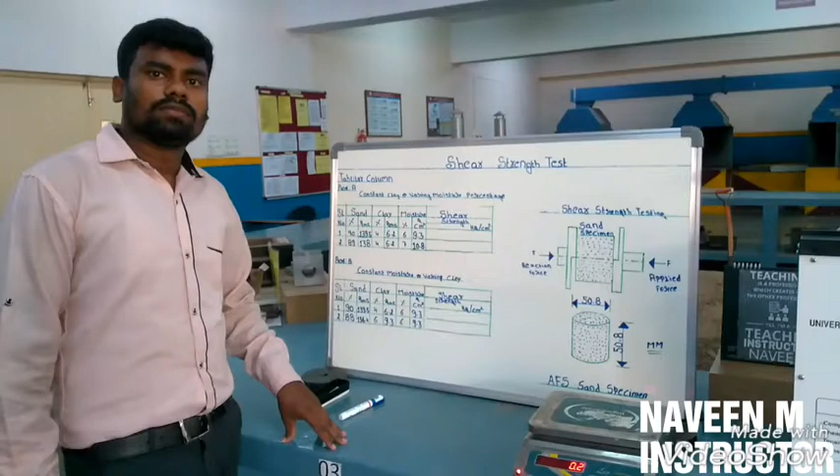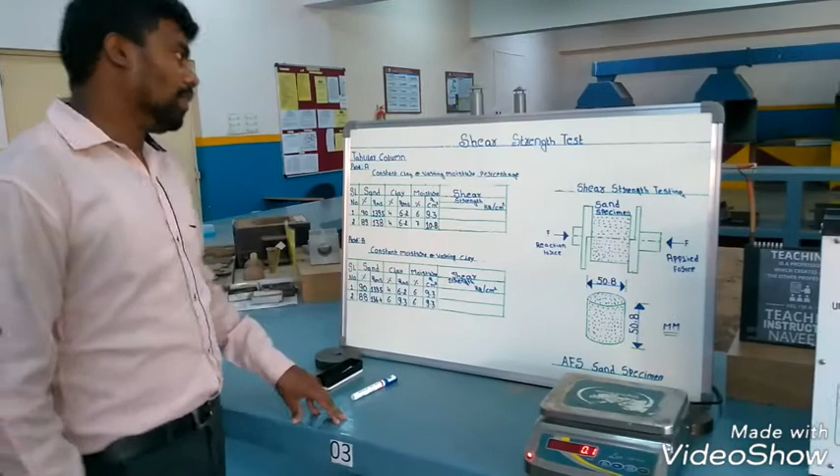Now we are doing the shear strength of green sand. When we pour the molten metal into the mold cavity, the shear force will appear. For that we want to do the shear strength test. Here we have written the tabular column, part A and part B.

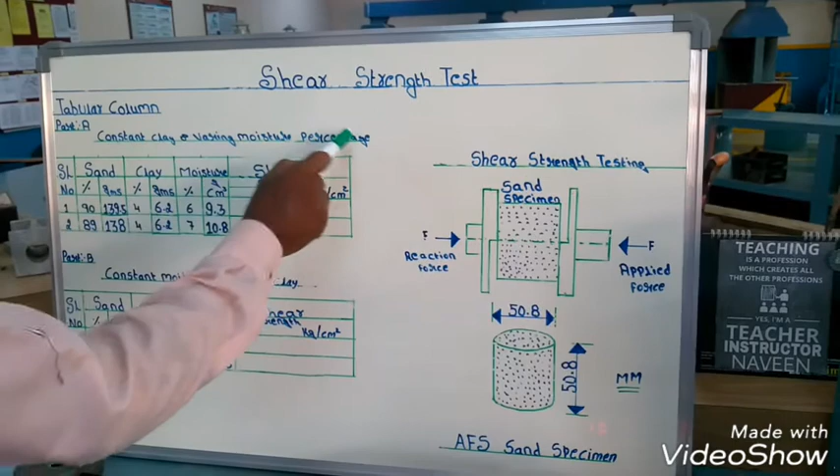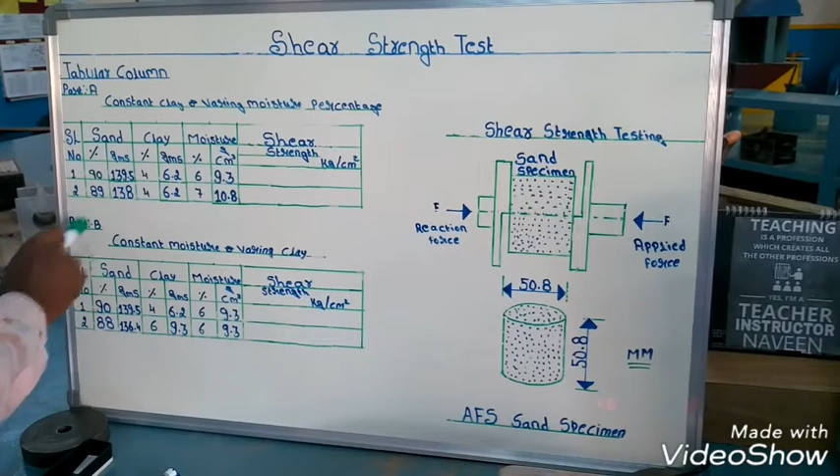For part A, the clay is constant and the moisture percentage varies. For 4% of clay and 6% of moisture, we want to find out what the shear strength of the green sand will be. Part B is constant moisture and varying clay. Here the moisture is taken constant and the clay varies 4, 6.

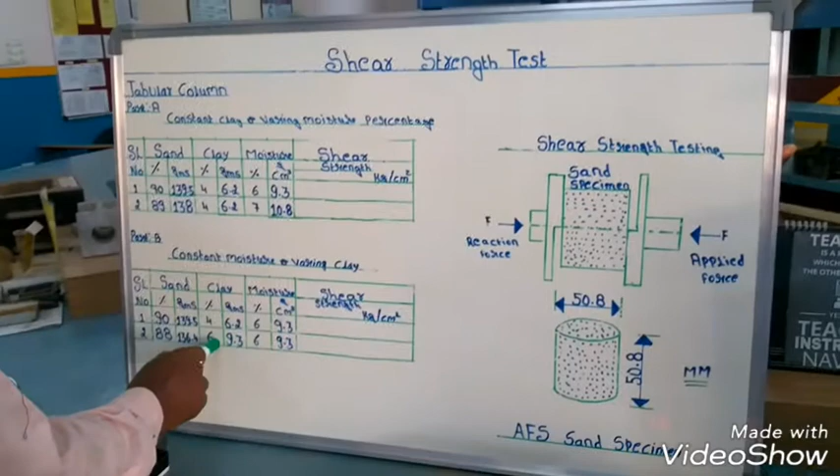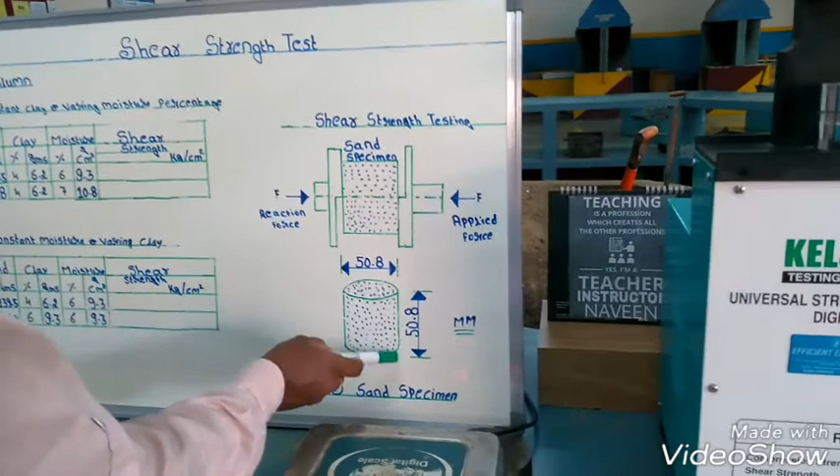Here we take the standard sand weight, clay weight and moisture, because we want to prepare the specimen with diameter 50.8 and height 50.8. When testing the shear strength, this is the standard height of the American Foundrymen's Society. As per this, we prepare the specimen now.

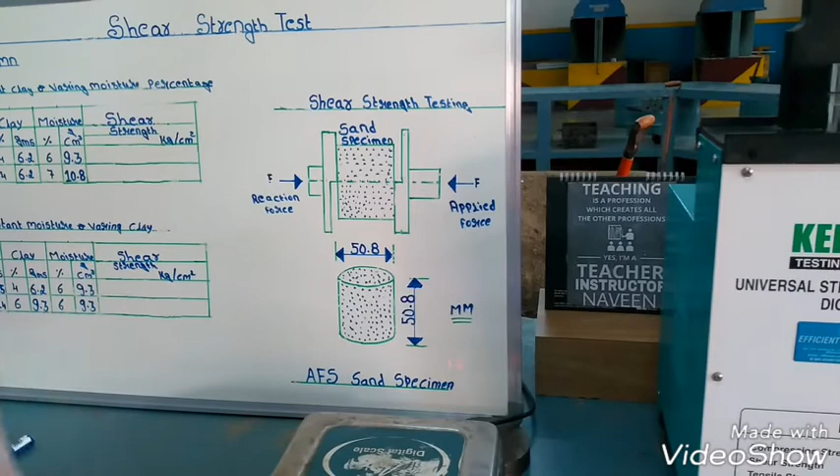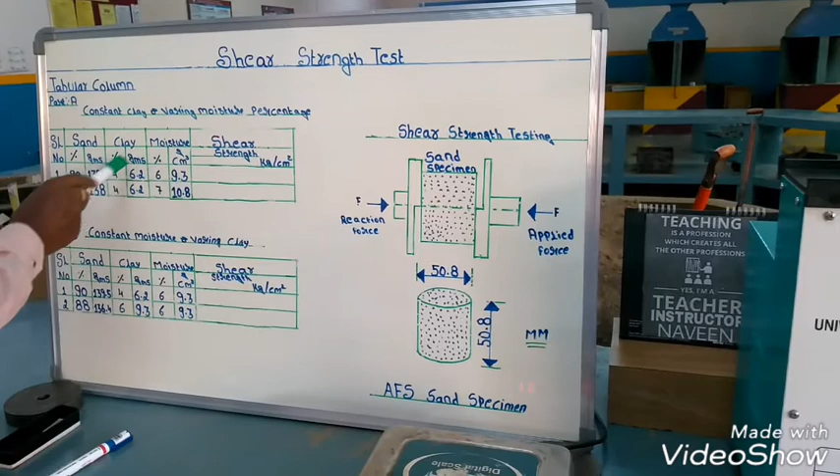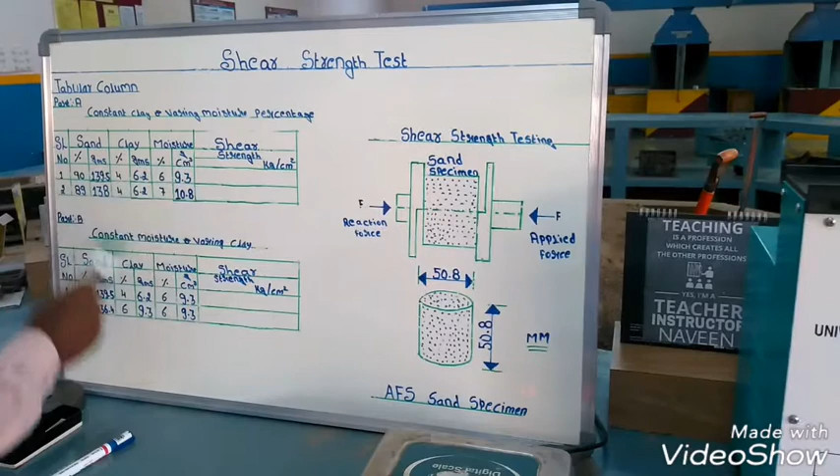When preparing the specimen, the sand is 90%, the sand weight is 139.5 grams, the clay is 4%, which is 6.2 grams, and the moisture is 6%, which comes to 9.3 ml; we can take it in grams also. We take these standard values because to prepare a specimen of height 50.8, the total weight should come to 155 grams.

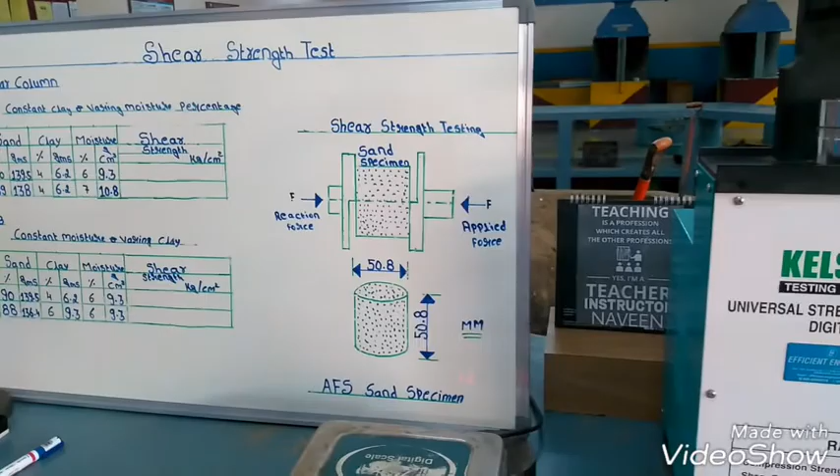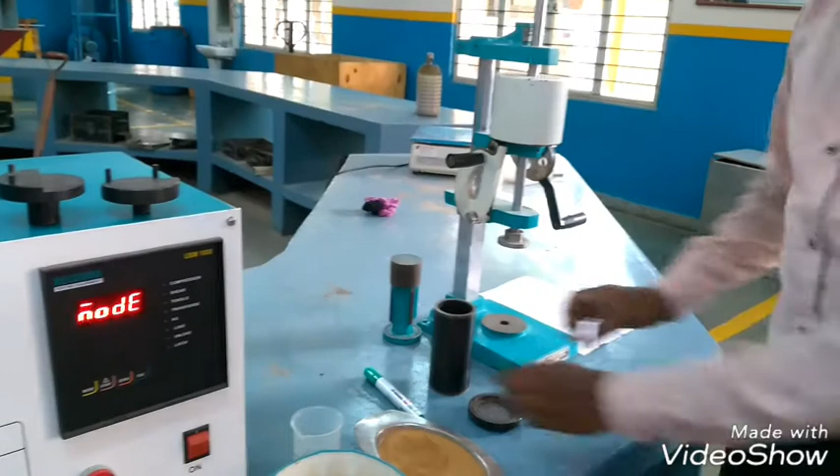Now the apparatus required: the universal testing machine, which is a digital machine, weighing machine, mixing jar, specimen tube, plate, and ramming machine. This plate we place exactly like this, and the tube we place here.

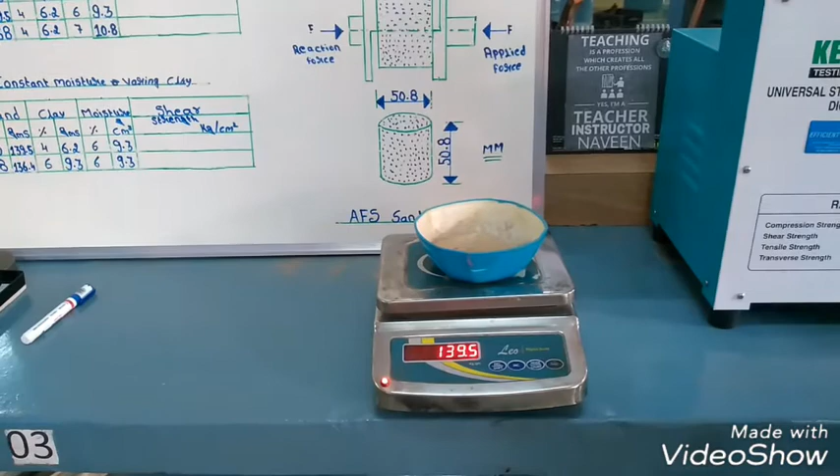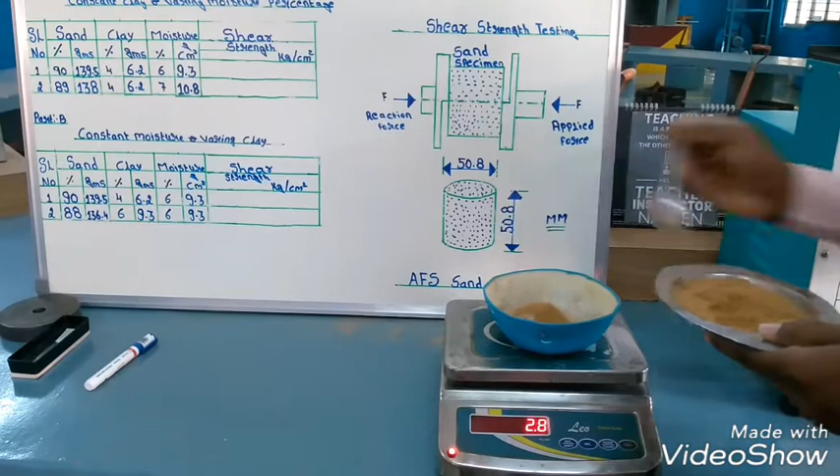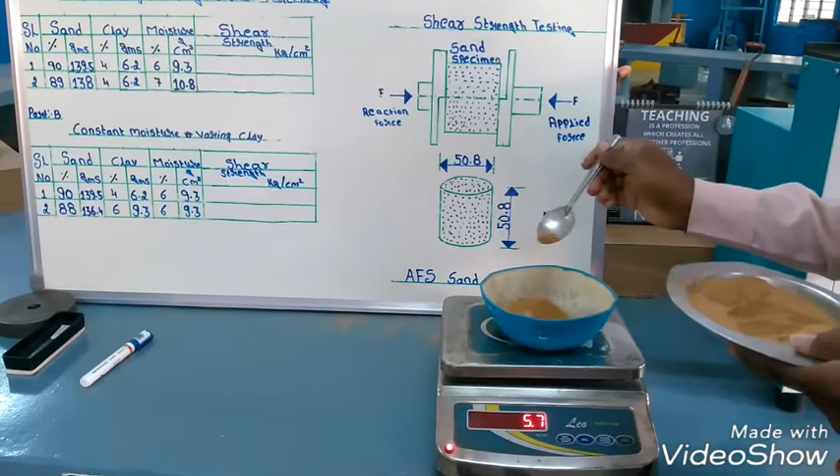Now we are preparing the specimen. We take the sand weight of 139.5; we are taking silica sand. Now we have taken the sand weight of 139.5. Next is the clay. The clay is 4%, which comes to 6.2 grams. Now we take the clay weight of 6.2 grams. Now we have taken the clay weight also.

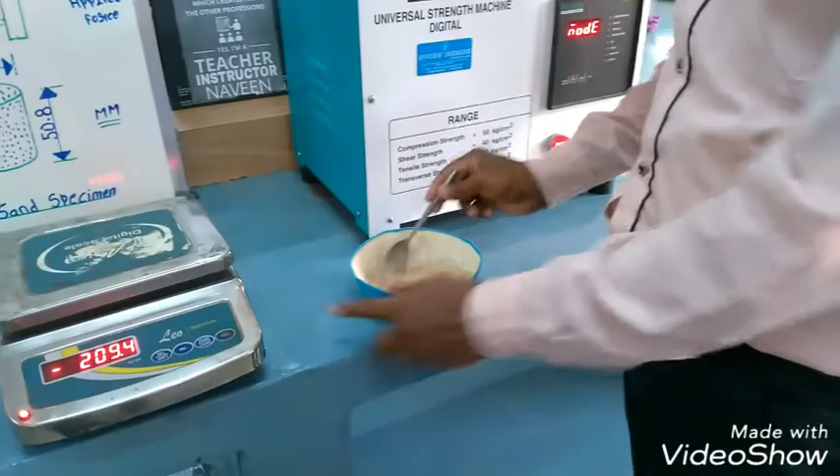Now for a minimum of 3 minutes we mix the sand and clay properly. Once the clay is properly mixed, we add the moisture. Moisture is 6%, so we take 9.3 ml. We can convert to grams also for moisture. Take the moisture as 9.3 grams.

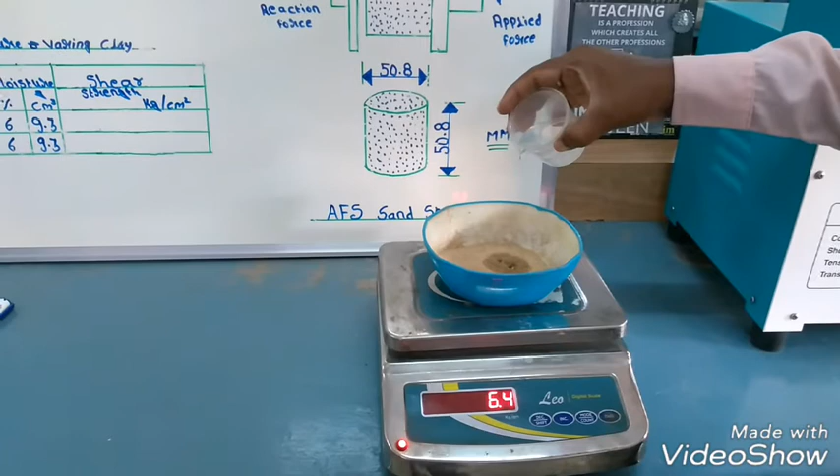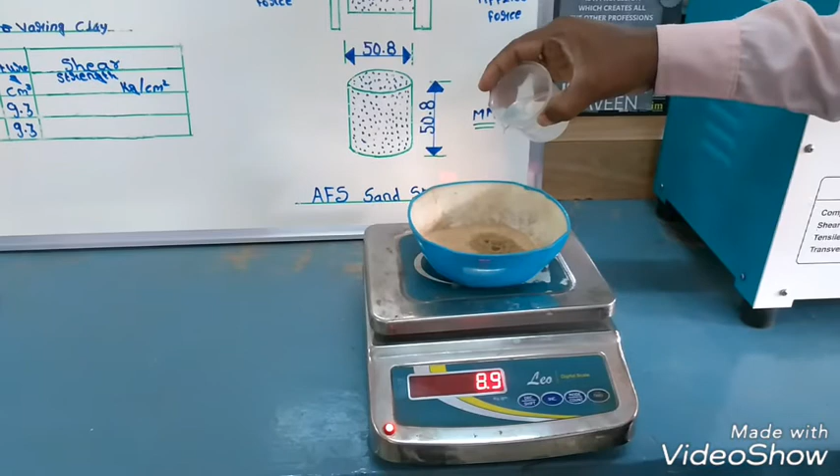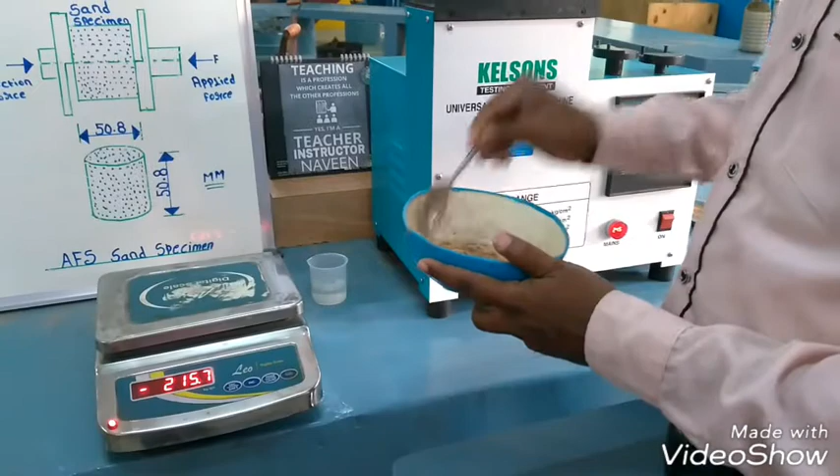Now moisture is taken as 9.3. Now properly mix the sand, clay and moisture for a minimum of 2 minutes. Now it is properly mixed. Once the sand is mixed properly, we do the ramming.

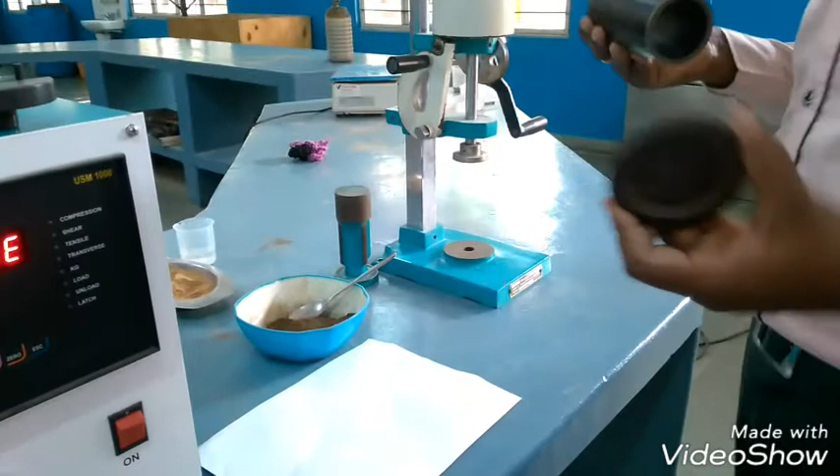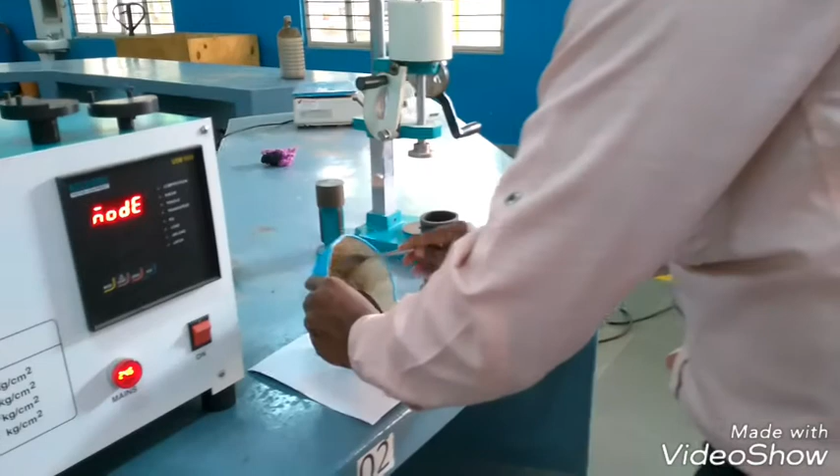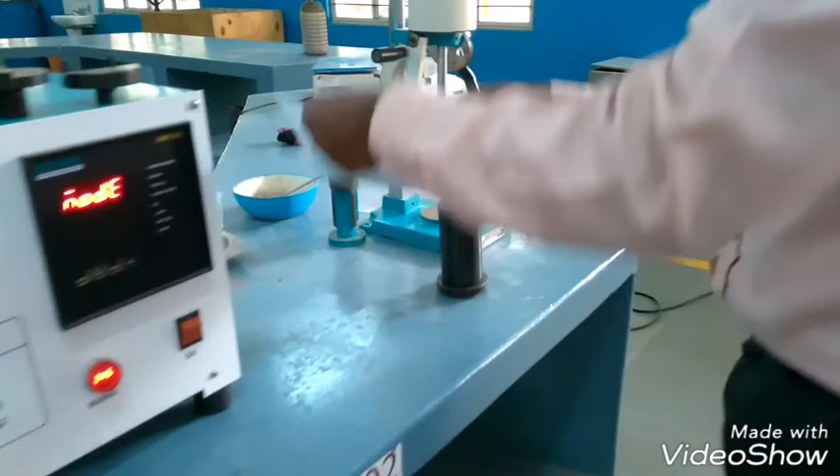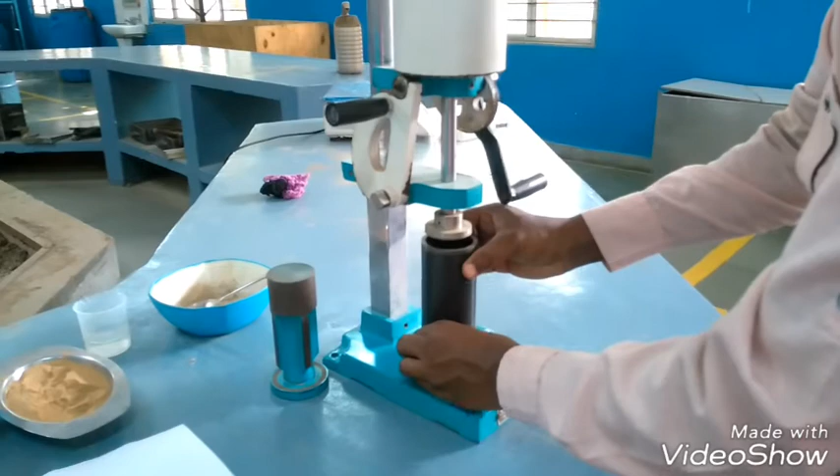Now use the specimen tube. Take the specimen tube with the plate properly placed like this. Now put the sand into the specimen tube using the paper. Put the sand into the specimen. When you are lifting, lift properly from the bottom, with the plate placed like this. Now we do the ramming.

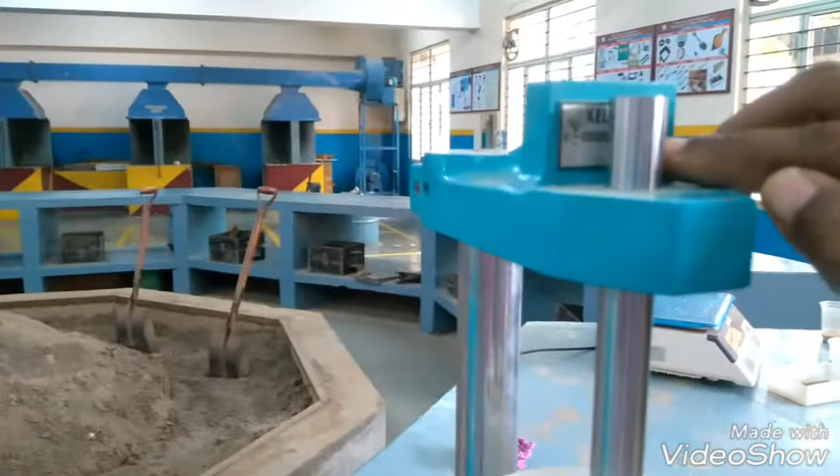First release the rammer lock. Once the rammer lock is released, we rotate clockwise 3 times. When we rotate exactly 3 times, since we have taken standard sand, clay and moisture weights, the height will match the middle line. It is the exact specimen height. Just observe how to do the ramming.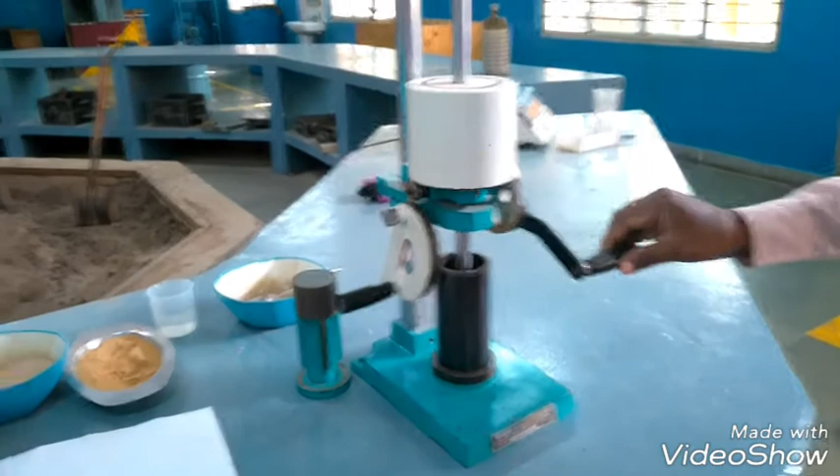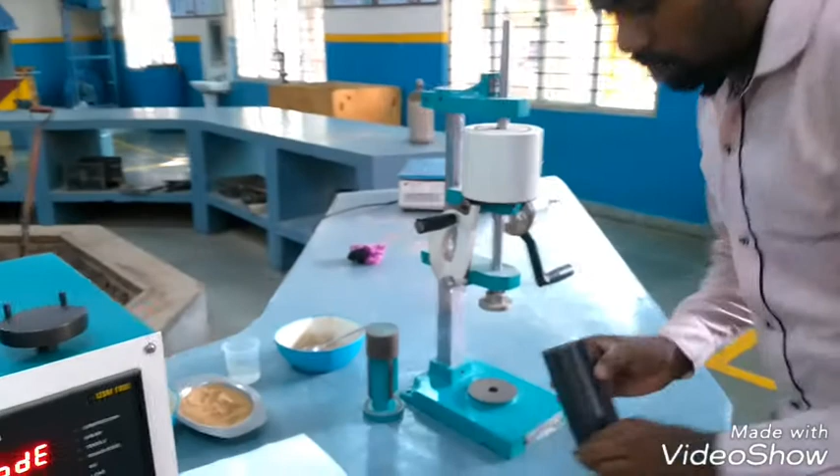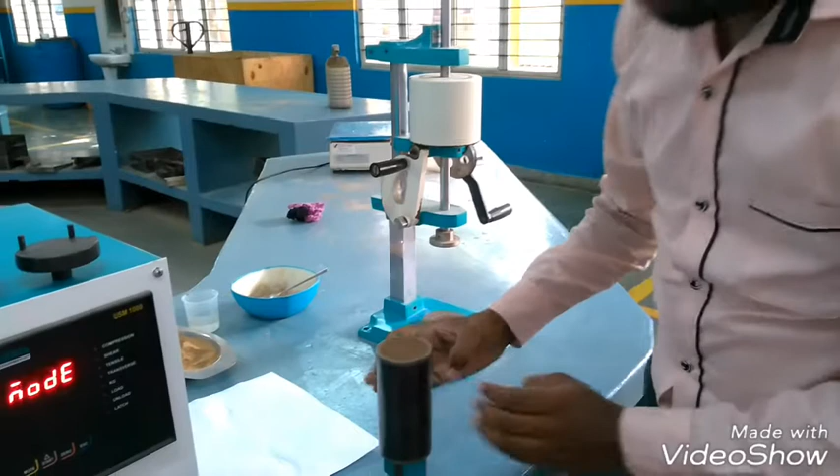We rotate it clockwise: 1, 2, 3. Now it is exactly matched to the middle line. Now ramming is completed. Now lock it again. Now remove the specimen tube, remove the plate, take the rod, reverse the specimen tube and remove the specimen. When you are removing the specimen, hold the tube like this and give a little compression.

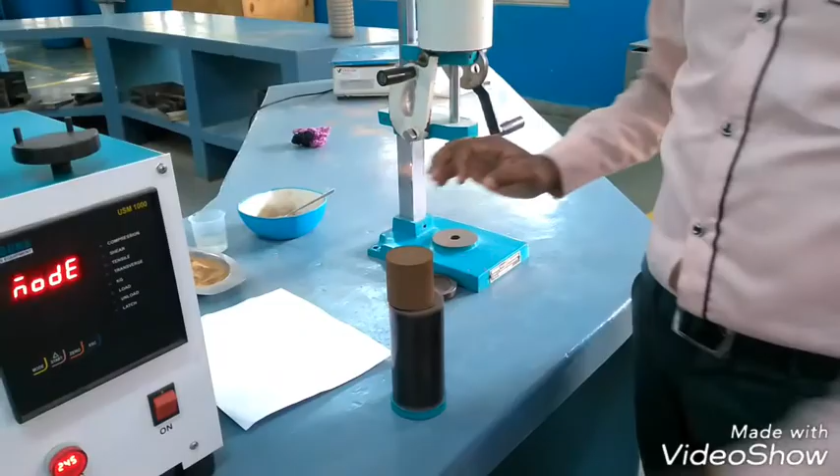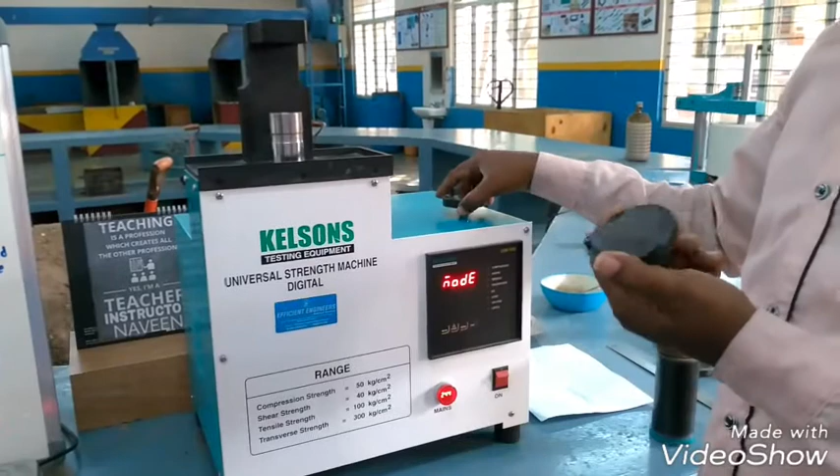Now the specimen is prepared. As per standard, the specimen height is 50.8 and the diameter is also 50.8. Now we are doing the shear strength. For shear strength, the shackle used is the stepped shackle.

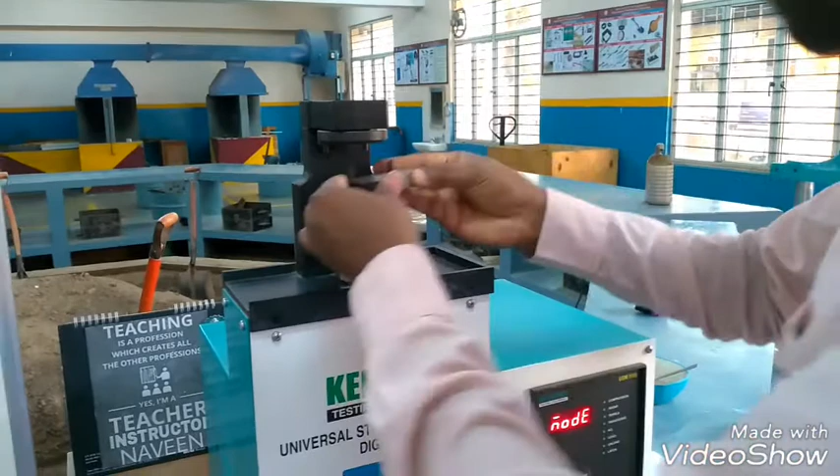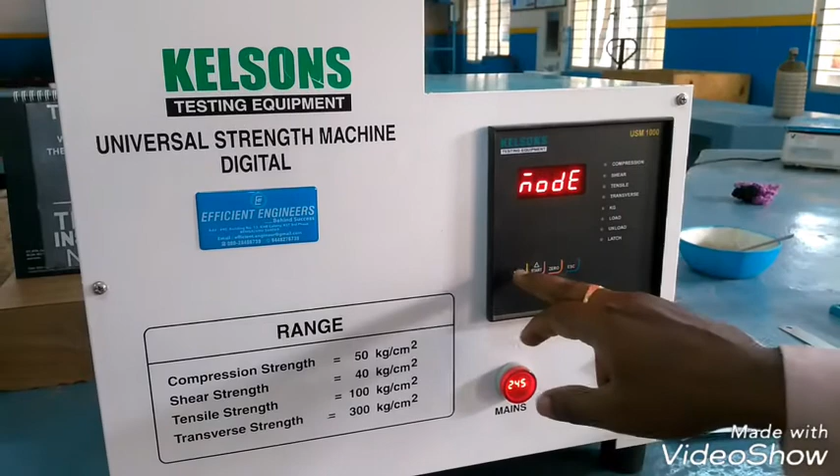Just observe here, it is the digital universal strength machine. Observe how to fix the shackle. The top one we fix like this, the bottom one we place like this. Now carefully lift the sand specimen and place it properly. Once it is placed, the mode will appear here. Change the mode to shear strength. Here they have given compression, shear, tensile. Now we select shear mode.

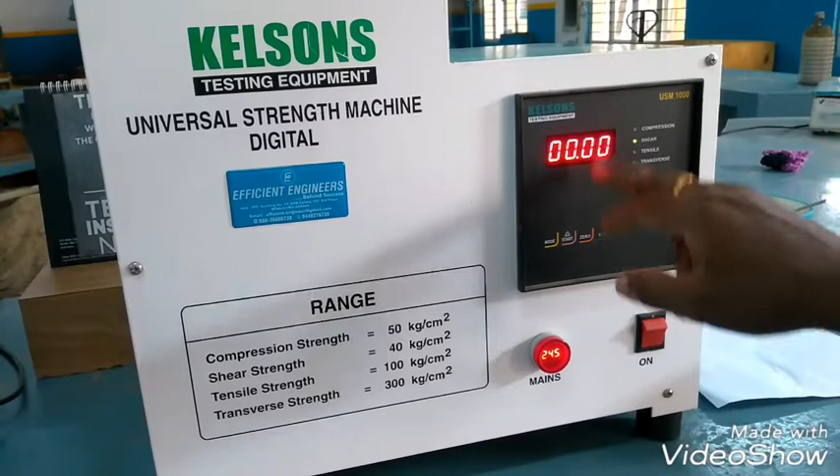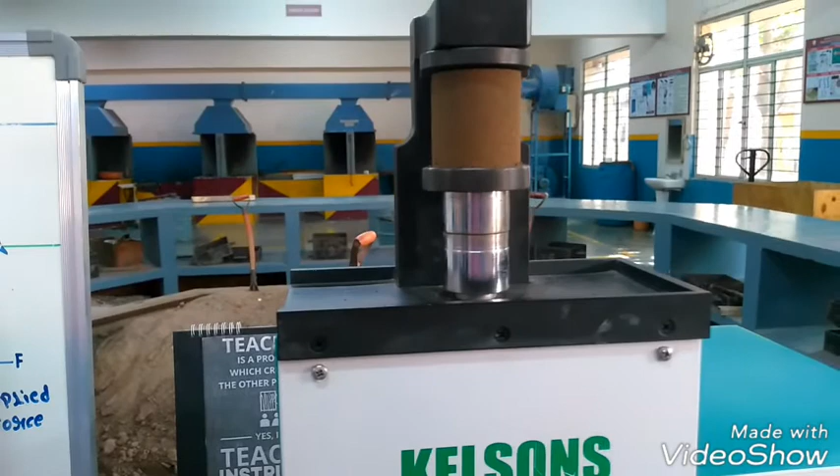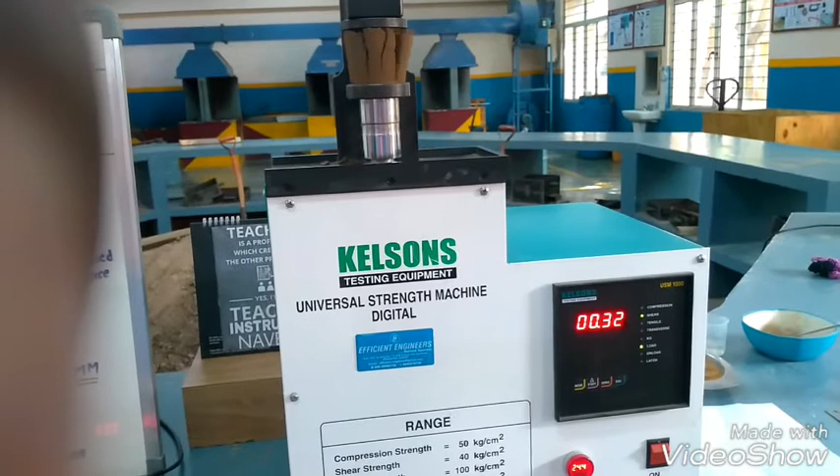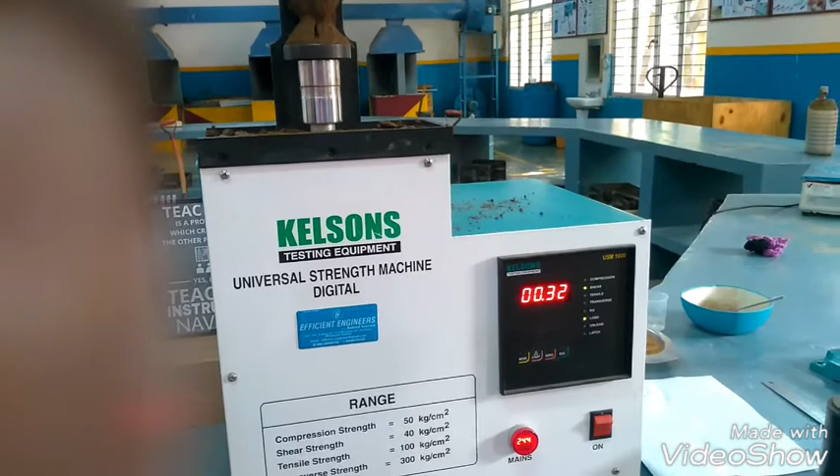Now make it 0. Once 0 comes, press mode, start, escape. We make it start. Now load is applied. Just observe, the shear strength will appear. Now force is applied. Now the shear strength is 0.32.

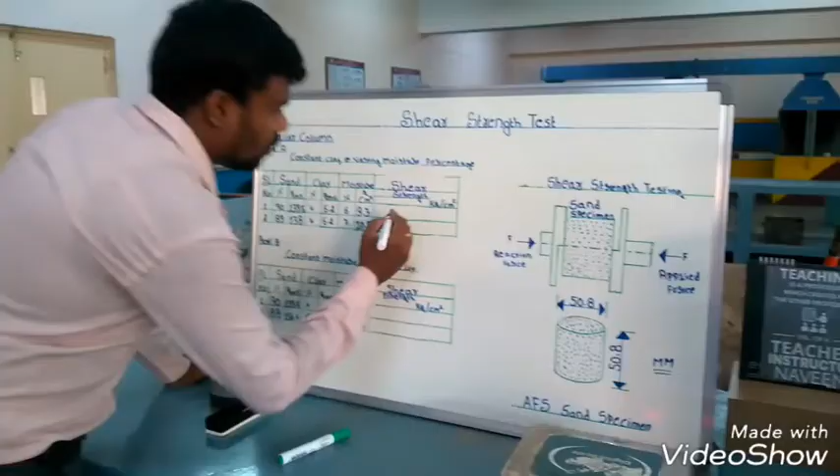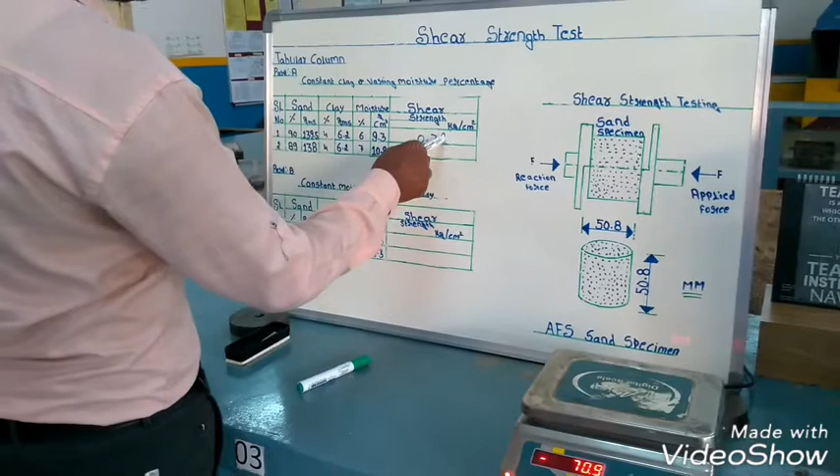Again press escape. Shear strength is 0.32 kg per centimeter square. With clay at 4% and moisture at 6%, the shear strength is 0.32 kg per centimeter square.

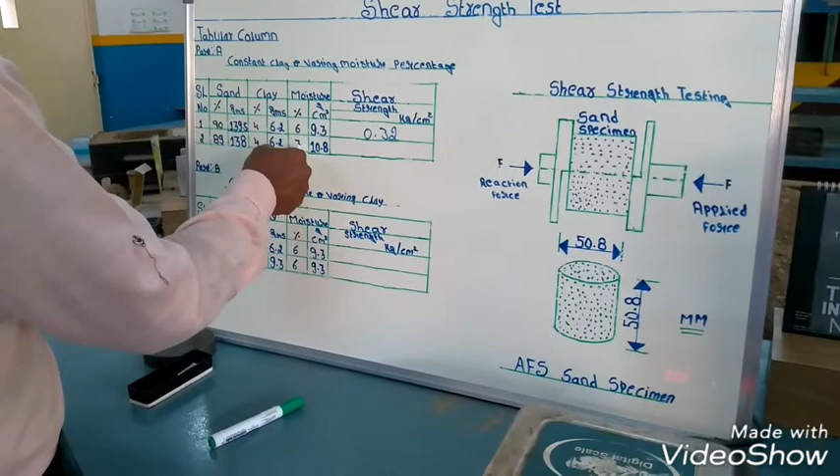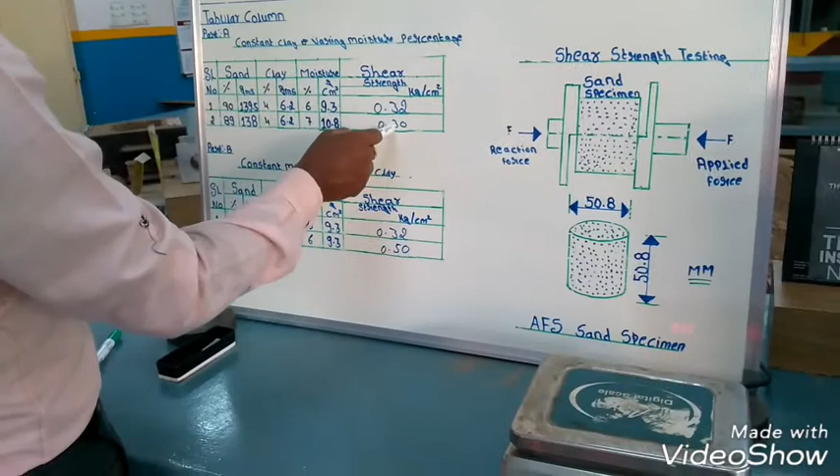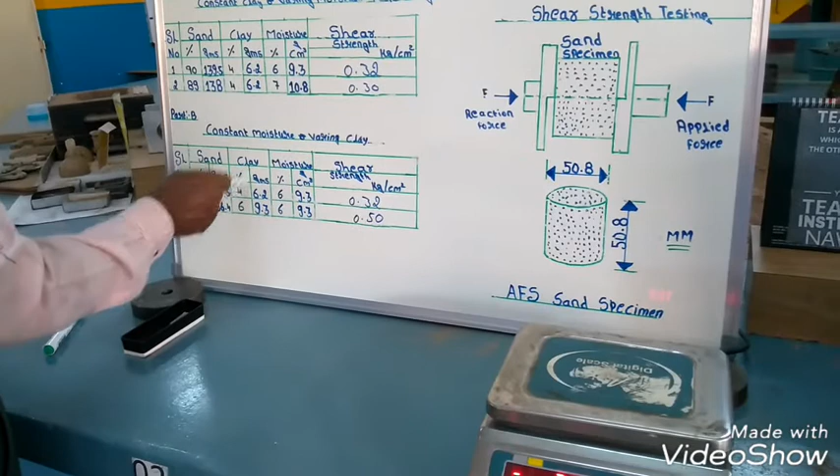In the next one, the moisture increases by 1%. The procedure will be the same. With 7% moisture, the shear strength is 0.30 kg per centimeter square. Next is constant moisture and varying clay percentage. The clay is taken as 4 and 6. With 6%, the shear strength is 0.50 kg per centimeter square.

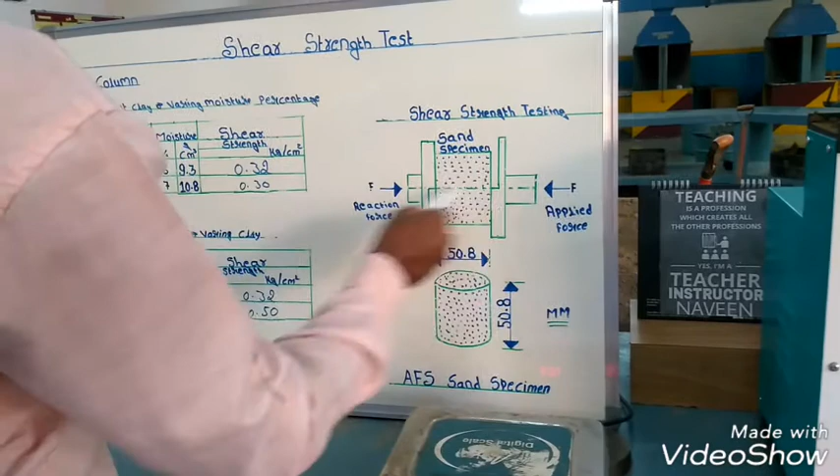Observe here, these are the shackles used for the shear strength test. This is the applied force, and this is the reaction force.